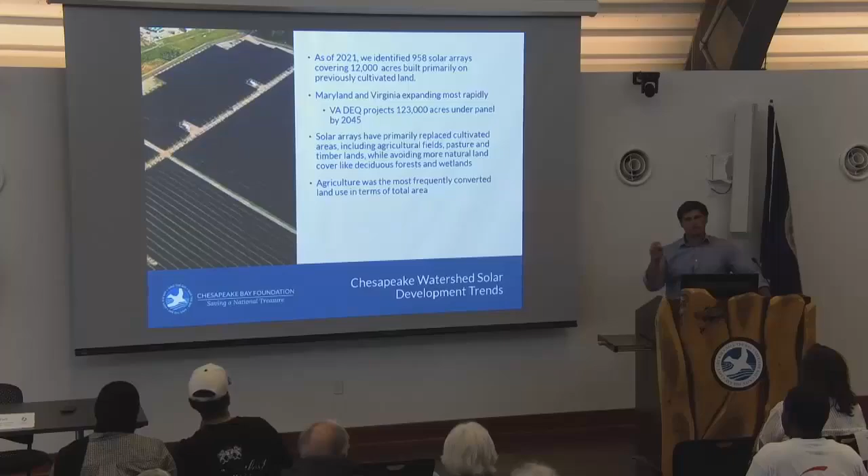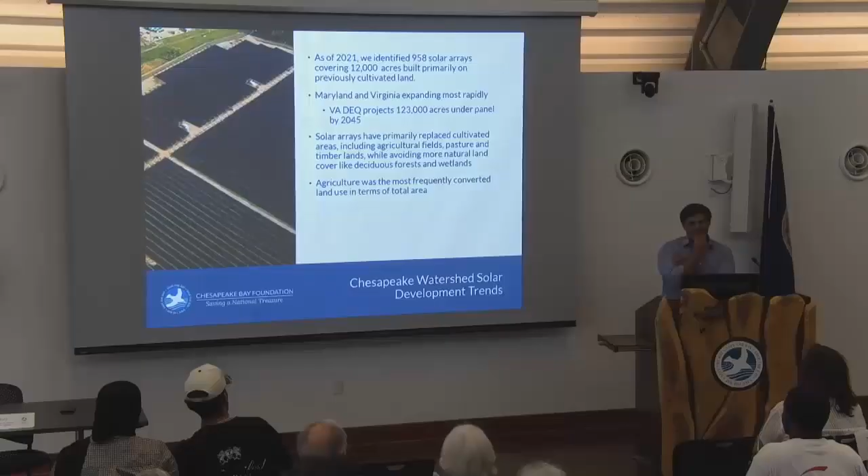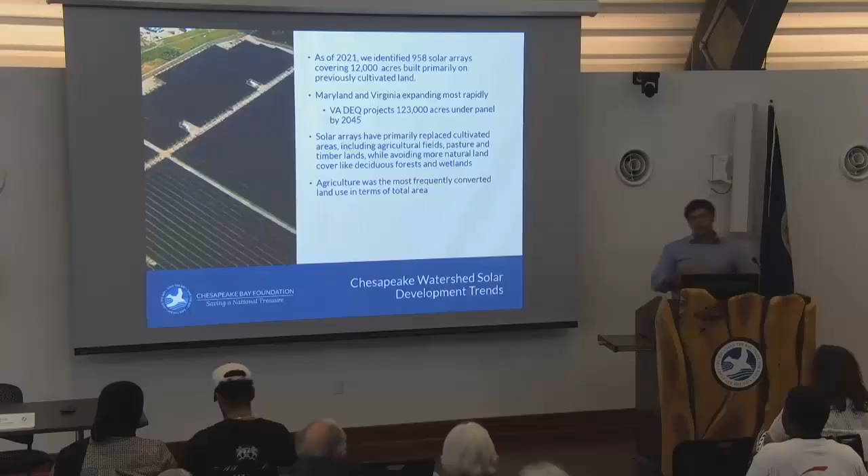Let me add an additional caveat: Norfolk's not a big city in landmass, so I don't want it to sound too large—I just want to give you a frame of reference. The dominant land use that's been replaced has been cultivated areas—agricultural fields, pasture, timberlands—and by and large they've avoided more natural land cover like deciduous forests and wetlands. There has been some Core 1 forest build-out in the DEQ analysis, which is something we try to move away from, but agriculture was the most frequently converted land use.

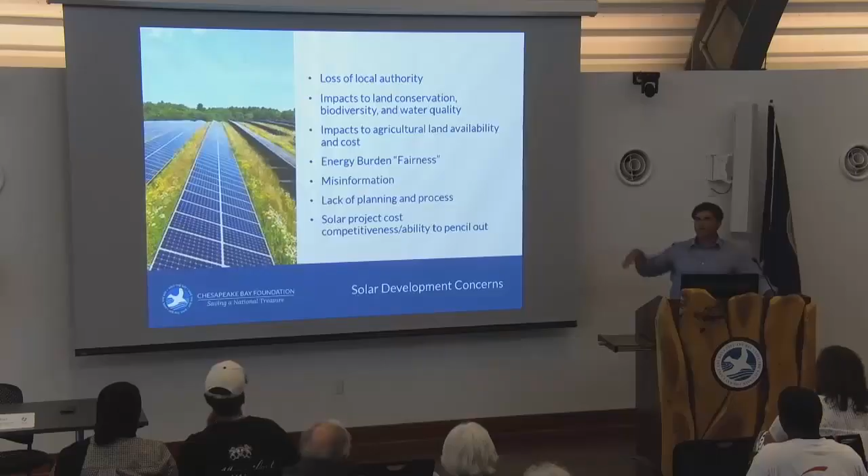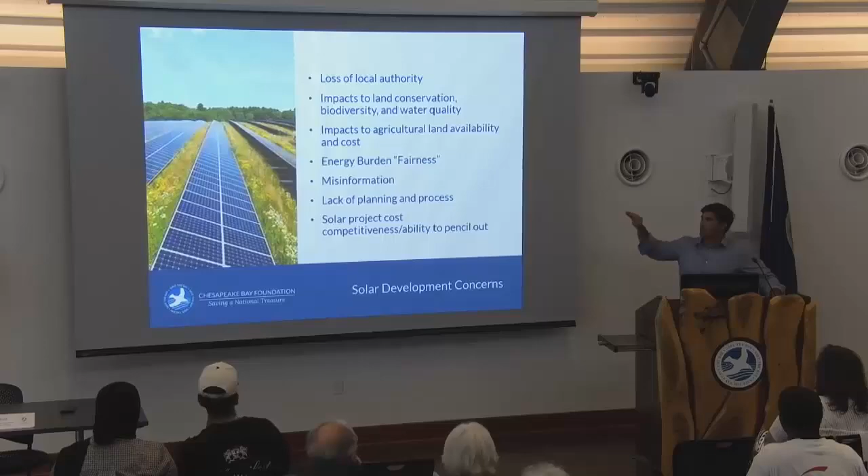Throughout the last couple of years, there has been some pushback as Virginia has tried to move towards deploying solar. We've heard a number of things from localities, from folks in the farming community, or just neighbors. Some of these are really key to CBF—we really perk up when someone brings up issues around water quality or long-term land conservation. There's been a lot of misinformation, but there also hasn't been a lot of resources given to the localities being asked to put these projects in. Things like lack of planning and process came up a lot as we talked to stakeholders around Virginia.

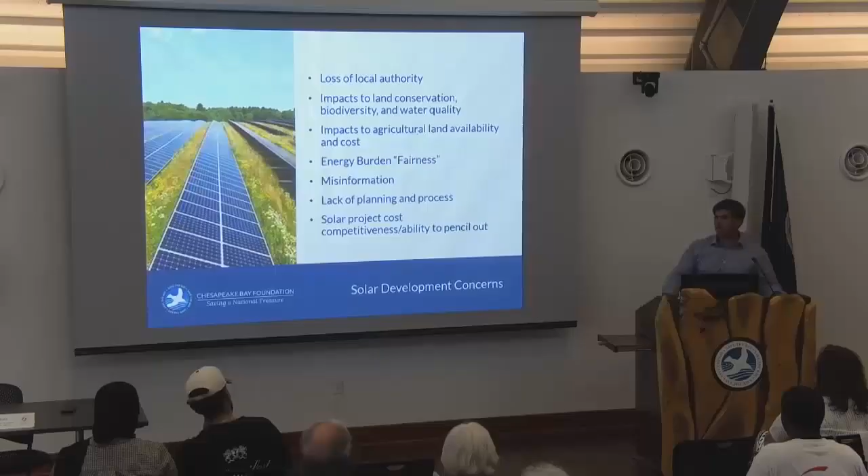So, make sure I didn't skip—this last year, as a result of many of those stakeholder concerns that were raised, there was a robust conversation about solar siting reform in Virginia. In direct response to what we had heard, there were a couple of legislative vehicles that considered two big principles.

One is regional planning. Right now, localities feel like the solar development process is sort of ad hoc—someone shows up, pitches you a project, you don't know how it fits into the larger grid, you don't know what your transmission lines look like, and you don't know if this is the first project or if there are going to be multiple projects. So people had a big question mark on what meeting our VCEA goals looks like across the state of Virginia.

Regional planning is something that's been really effective in a number of sectors throughout the state, so it was a good place for us to start.

The other thing we heard from localities was these projects are really complicated. We don't know how to evaluate whether or not it's a good project, or whether we should be asking for something different because this is a new technology. So the idea of advisory services, setting up a panel of technical expertise that localities could turn to and say, help us understand this. Many localities being asked to accept solar projects right now have a part-time planner, if they have that. So there was a real technical capacity question.

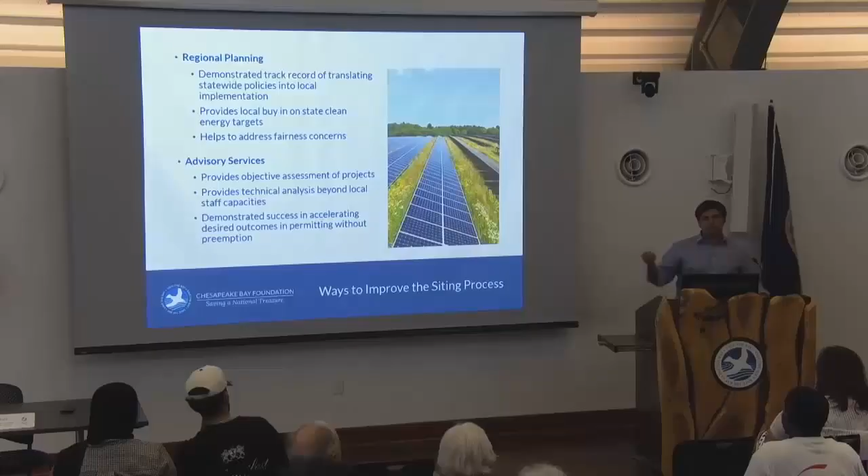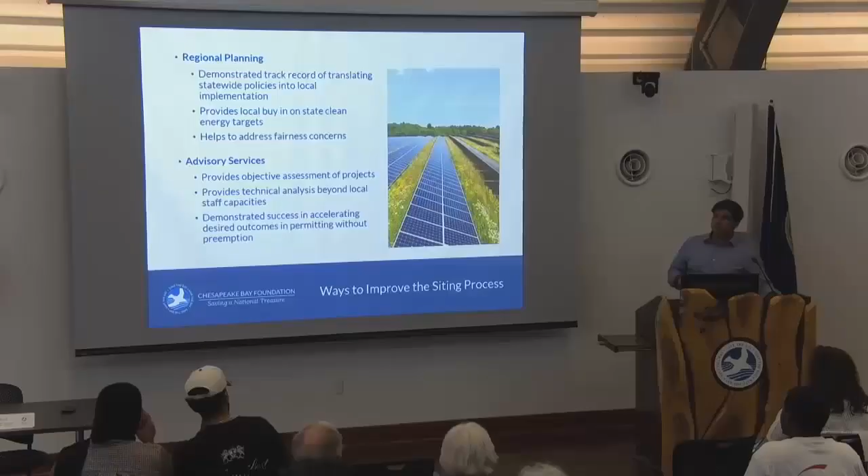These were two of the potential solutions floated this year to help accelerate solar deployment. They did not make it out of the General Assembly, but both concepts have since found fertile ground in other venues. We recently saw comments from the State Corporation Commission recommending some type of regional planning, because there wasn't consistent thought given to how potential projects were going to fit into the grid and transmission. So these are ideas that have been bubbling up in many sectors.

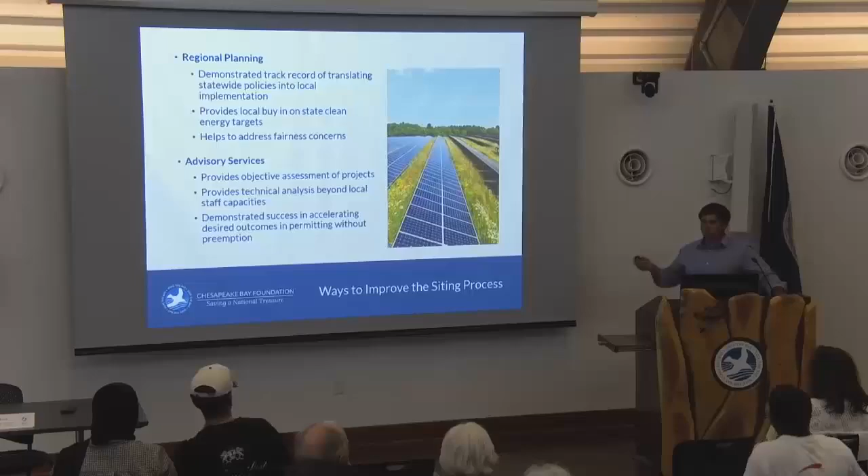Additional ideas for accelerating solar deployment over the last year or two include trying to incentivize siting on previously disturbed lands. In Virginia code, that's anything we've done something on - not just super degraded land, but a big box store, a parking lot. Right now we are really struggling to find a way to accelerate deployment on those previously disturbed soils. So people have floated a lot of different ideas around incentive programs or zoning changes.

We saw legislation this year that really focused on parking lot solar. Unfortunately it did not make it out, but we are hopeful that's going to come back next year.

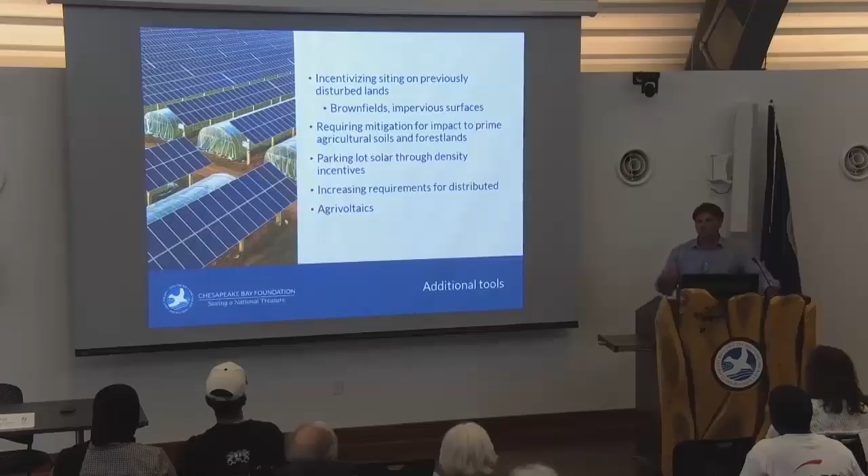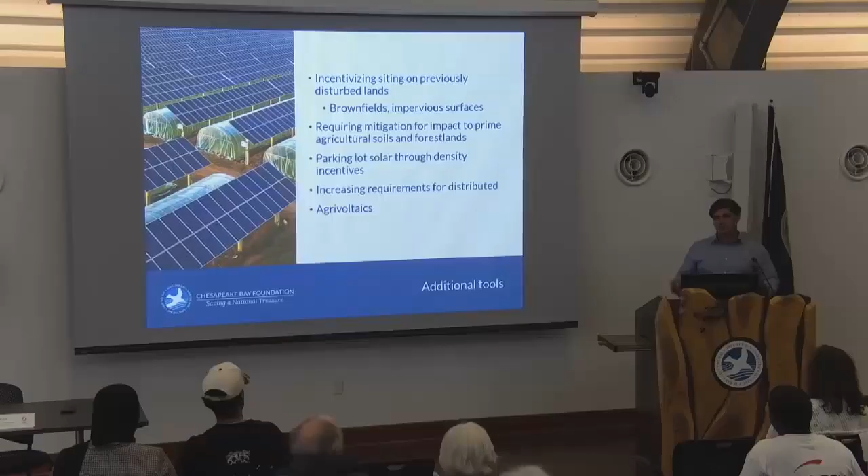There was a big effort around mitigating when solar is located on prime agricultural soils or forest lands. That process has continued and got to a final rule, a place that we're all very comfortable with. So when people are building on prime ag land or forest, they will have to acquire land or pay into a fund elsewhere to make sure we're locking up prime land in addition to the land they're building on.

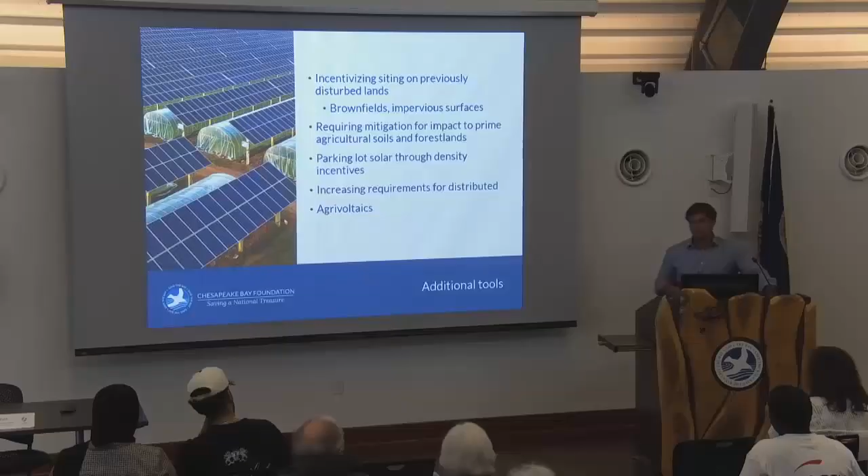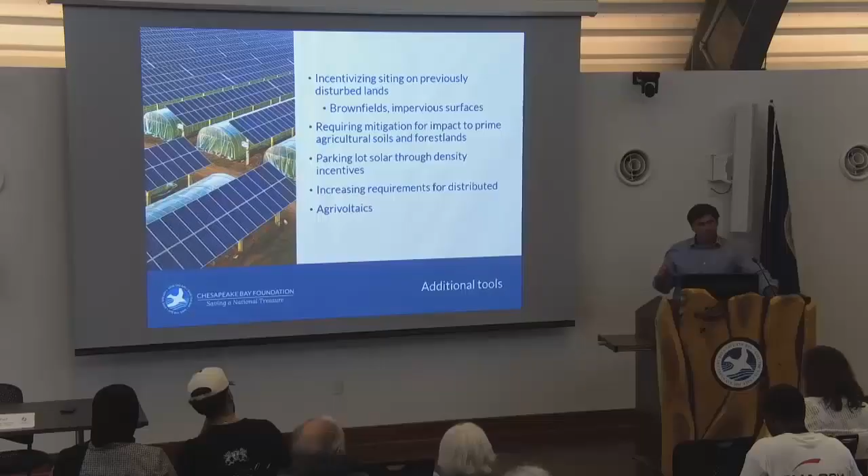And then an area where I think we were really just scratching the surface is the idea of agrivoltaics. Virginia has not really taken meaningful legislative action on this. We're behind where a lot of other states have moved so far, where they've looked at incentive programs, at codifying a definition for by-right solar for farmers that want to produce a crop while also being able to install a solar farm on their property.

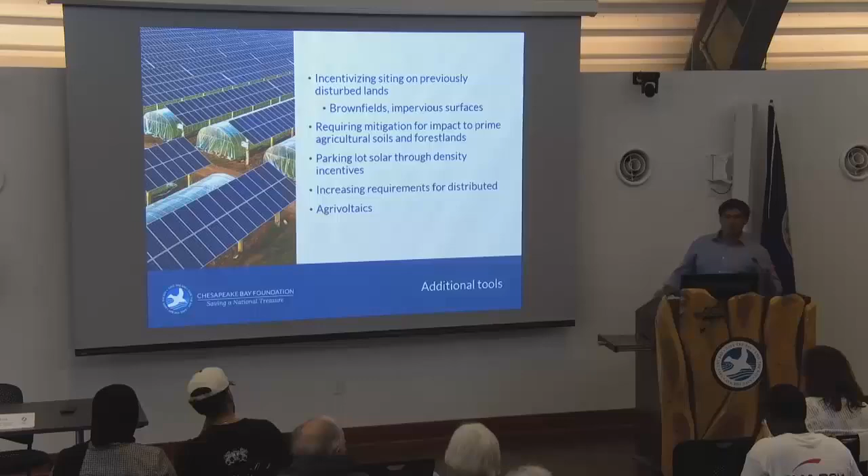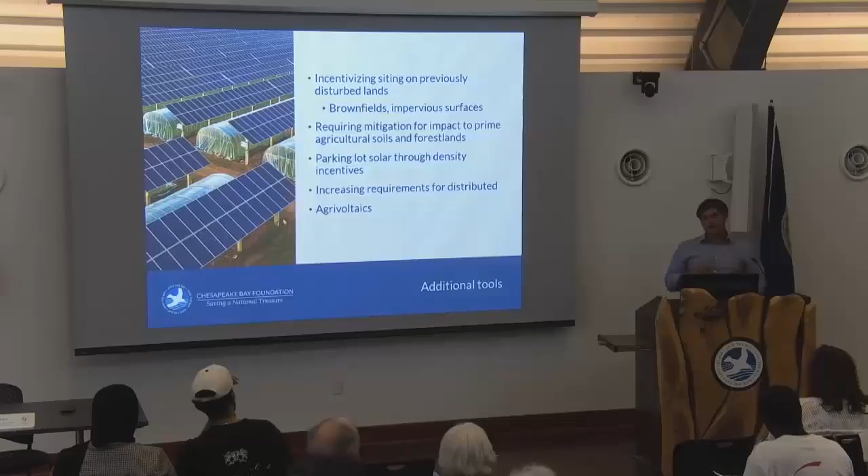And when you look around the world, there's some really innovative stuff happening. What you see on the slide here is folks growing shade crops that need shade under the solar panels. Makes a lot of sense - I don't know why this didn't occur to us earlier, but this model has been very successful in China. They're growing a lot of cut flowers, they're growing some fruit crops, and they're doing it all under their energy production. I think that's pretty incredible and something Virginia needs to continue to take a harder look at.

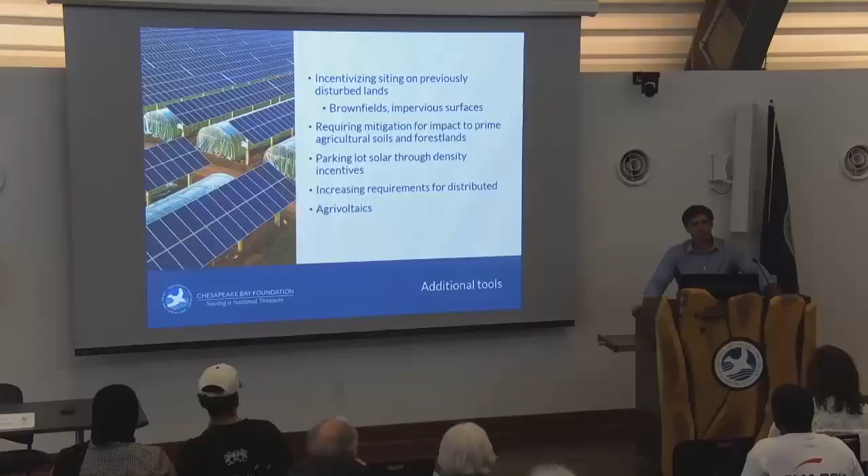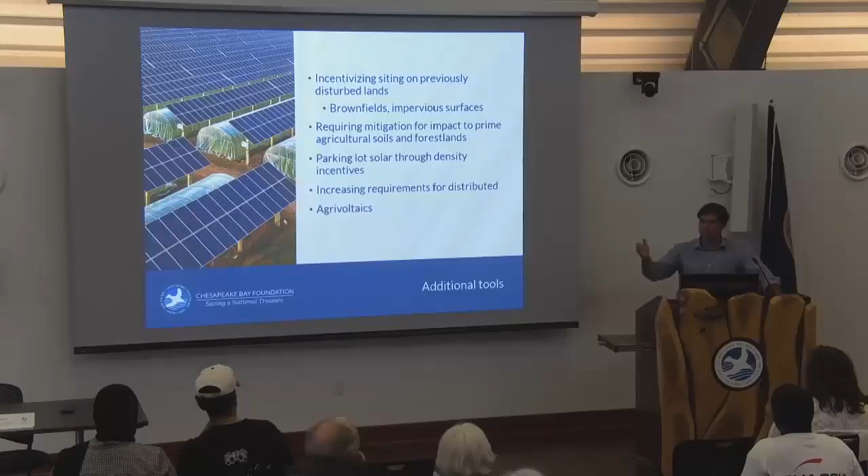We've had some missteps in our foray into agrivoltaics. I have one project where I live where we were supposed to have sheep everywhere, and I've yet to see a sheep under said panel. So people are now, understandably, annoyed that they were sold a bill of goods that didn't come to pass. But part of that is because ownership of these properties changes a lot, and the contracts don't always continue on - that's one of the things we want to look at in trying to incentivize agrivoltaics.

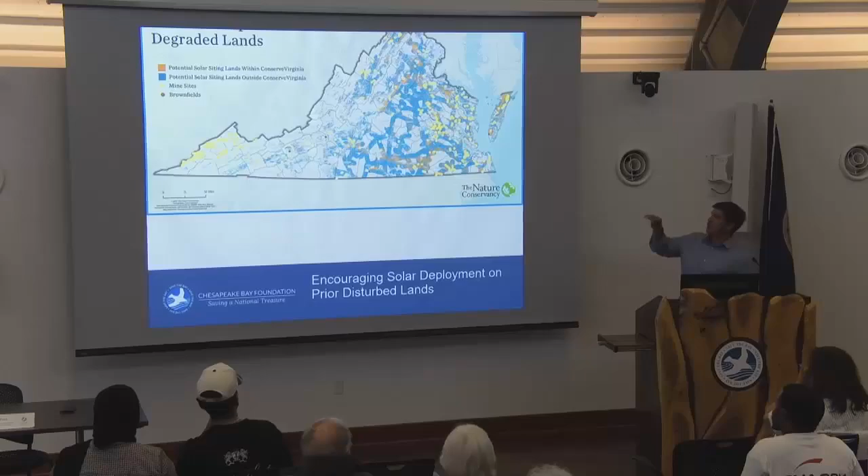Just a real quick map, produced by our friends at the Nature Conservancy. It shows the blue are lands that are good for solar, same with the brown - those are ideal tracts. The sites in the brownish orange are also in Virginia's map for high conservation value lands. So for us, this is really a shorthand map of where you should not site solar, as well as where you should. This also tries to flag mine sites and brownfields, both in that highest level of degraded soil. We've yet to see widespread adoption of siting solar on those sites - we haven't found the right incentive package yet, but we're hopeful we will.

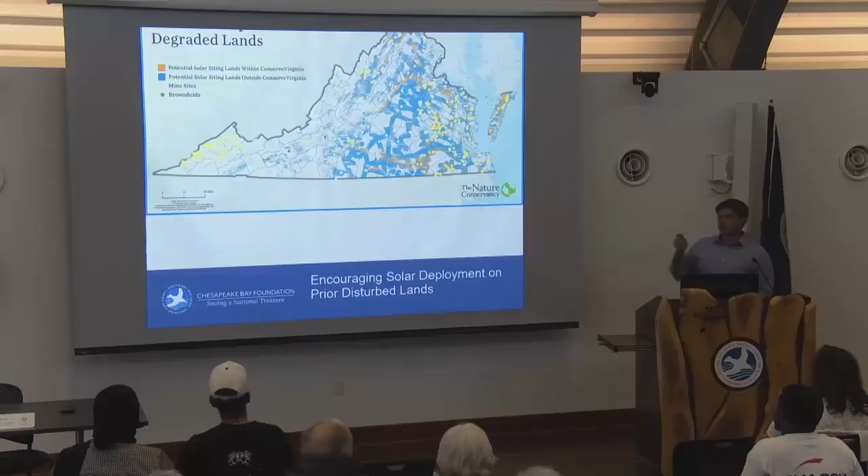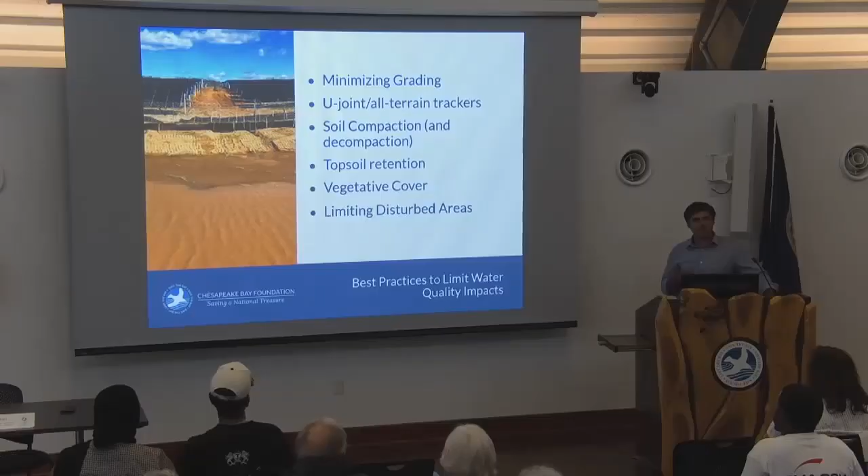And then for the Bay world, what can we do to minimize water quality impacts? We have seen some unfortunate stormwater examples around the state. We have 5 notices of violation in Richmond County right now while we're sitting here. Not a great week. So there are some things that can be done

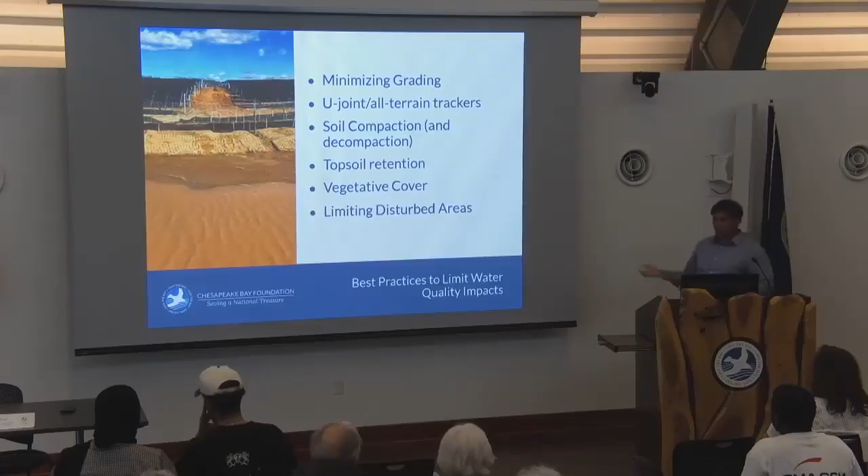that minimize potential water quality impacts. So minimizing the grading—I'll come back to this all-terrain tracker in a second. Making sure you're limiting soil compaction or requiring decompaction at decommissioning. Topsoil retention. A lot of the sites are scraping them in order to accommodate certain technologies, and they're essentially leaving

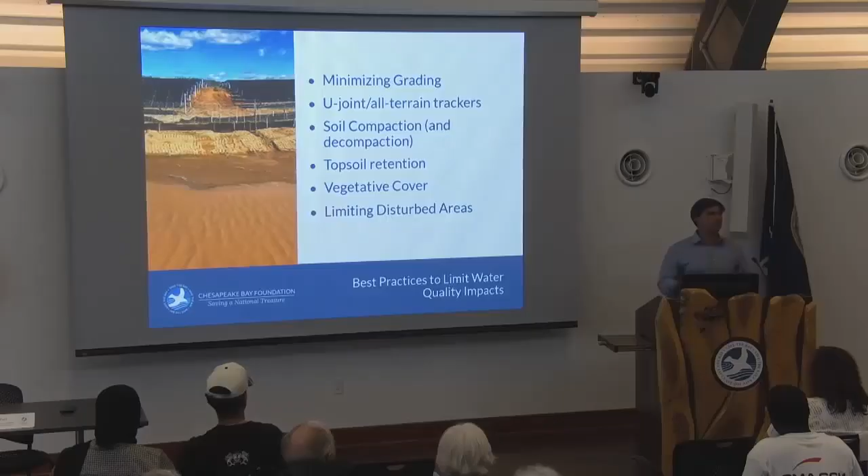bare fields that are then stormwater hazards for the surrounding areas. Requiring vegetative cover and more robust cover, and then a recent concept that has taken hold in a number of states is this idea of limiting how much of the site can be disturbed at a given time. Because if say you're going to do a 6,000 acre project, previously you'd get a contractor to come in and they would clear 6,000 acres. You're not building on that, so you just have a ton of exposed land during that time. Real simple change is chunking it up and saying, okay, you're going to clear 500 acres at a time,

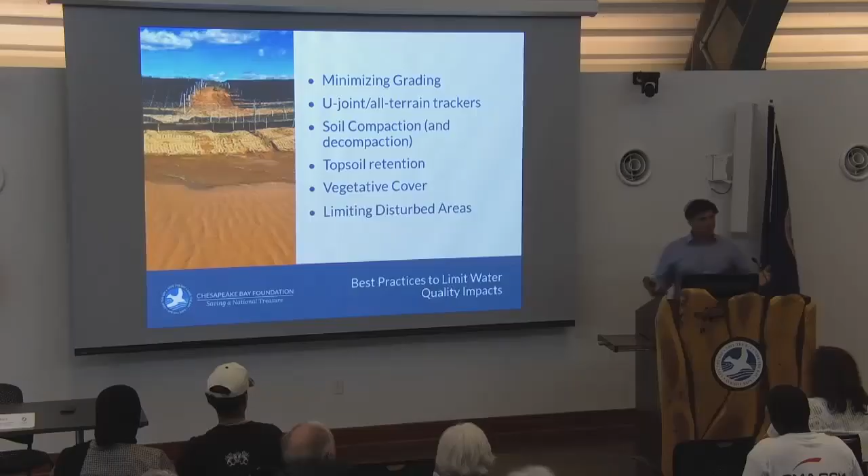and make sure you're working and covering it as you go. We've seen this successfully implemented in other states. So these are not difficult things to do. They're really, in some sense, common sense, but we hope to see them adopted as industry practices.

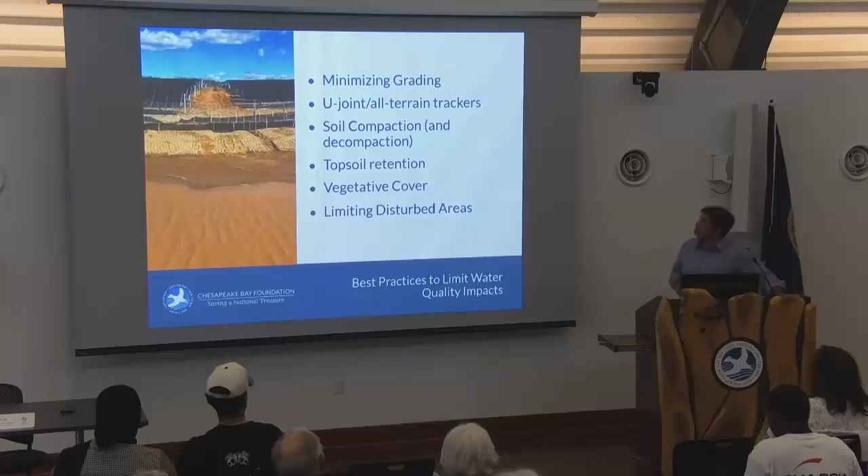The terrain tracking joints, this is what they look like. The advantage they offer is you don't have to take away the topsoil, and you can work with the grade of the land. It allows essentially joints in the panels rather than needing a singular flat surface, which many of the design forms require. And so encouraging people to move to these terrain trackers would also minimize disturbance and potential stormwater issues.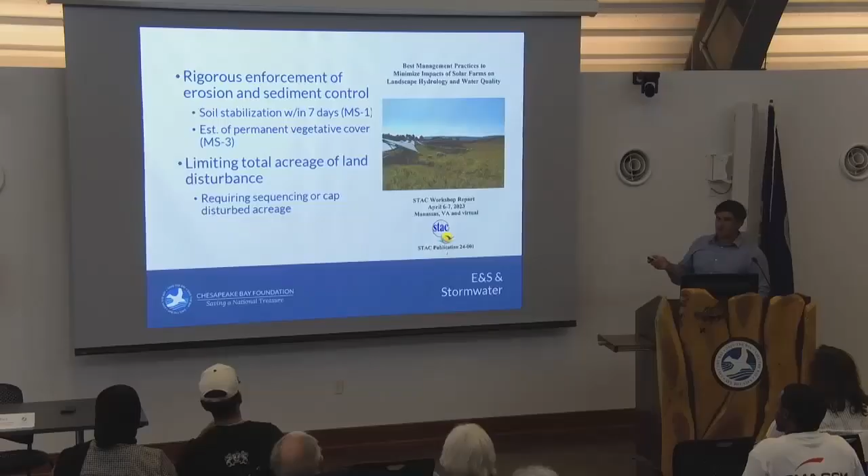A lot of this, the state has already taken action on through updated stormwater guidance. So I'm not going to spend a ton of time on this, and I already touched on limiting the total acreage. But again, Virginia's been very active on this the last couple of years. We think they've made positive progress, but there's still some more best practices that can be adopted. And

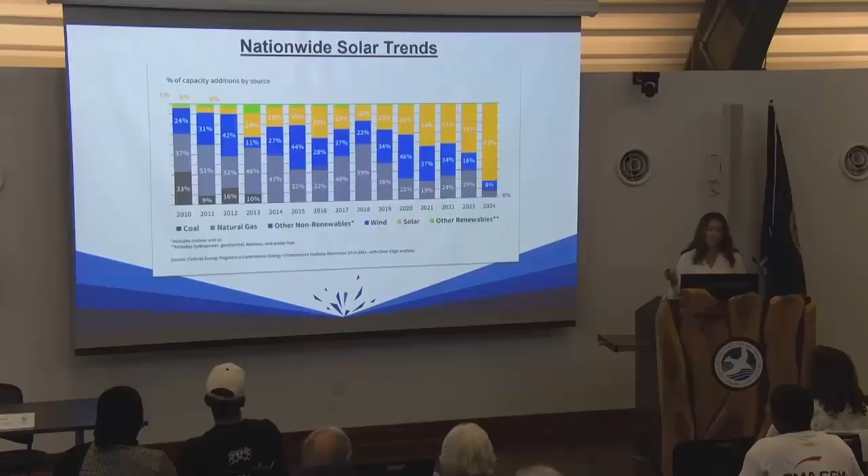Basically, the legislation has a lot of small targets to get to that level—for example, 30% renewable energy by 2030, that's the next iterative target. There are also targets for 2031 and 2032, which I didn't put all of in here. But essentially, the utilities every single year have to have a plan in place to eventually reach these targets and the interim targets.

When I was on the State Corporation Commission, they had to submit that plan to the commission for approval. So there is an entity making sure our utilities are meeting those targets. It's really important to note that if they don't meet those targets, they have to make a deficiency payment, which is like a penalty. That payment is set at a level that incentivizes utilities to invest in renewable energy.

There's a lot of terms in the law about how much the utility can own versus how much third parties can own. I don't think we need to get into that level of detail today, but understand that the utilities have a massive incentive to make this transition.

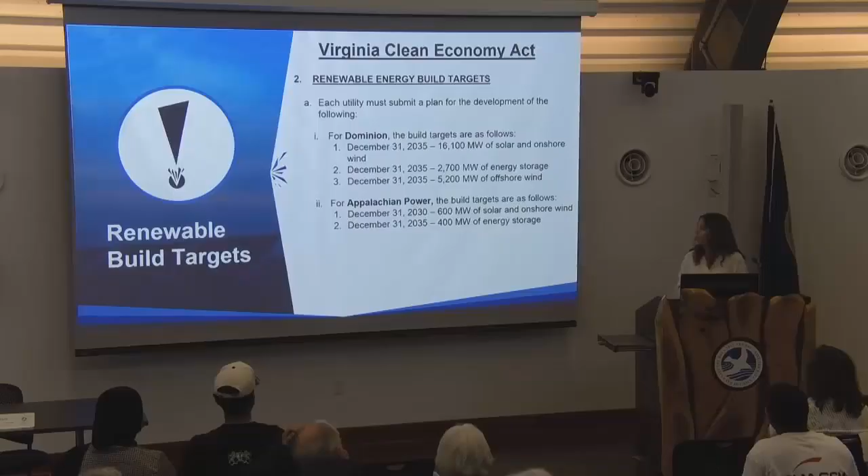Appalachian Power is smaller. They have a much smaller service territory and are coming from a much smaller renewable penetration to begin with, so there's 600 megawatts of solar and onshore wind and 400 megawatts of energy storage. Let me put that in context for you.

16,100 megawatts of solar is enough to power 1.8 million homes. That's not all of Virginia, but it's a pretty significant swath. 2,600 megawatts of offshore wind, the current facility under development here that'll be operational next year, is enough to power 660,000 homes. Put together, that's roughly 2.5 million Virginians powered by clean, non-emitting energy, which is pretty significant, and that's the foundational layer of the Clean Economy Act. For Appalachian Power it's a smaller number, but still 67,000 homes, which is really important for that territory.

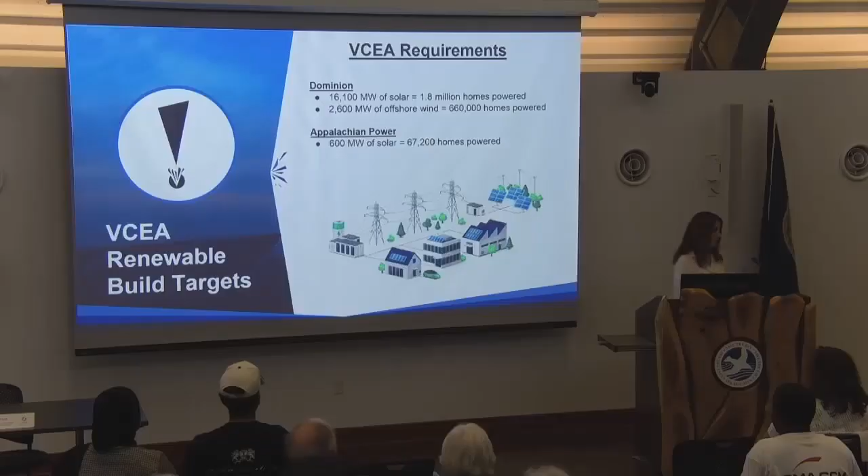So the Clean Economy Act is our most significant law. It sets the tone for how Virginia is going to get to these 100% clean targets. I'm sure there's more for us to discuss, but I wanted to set the foundation for where Virginia is. With that, Christy, I'll turn it back to you. Thank you.

Great questions are coming in.

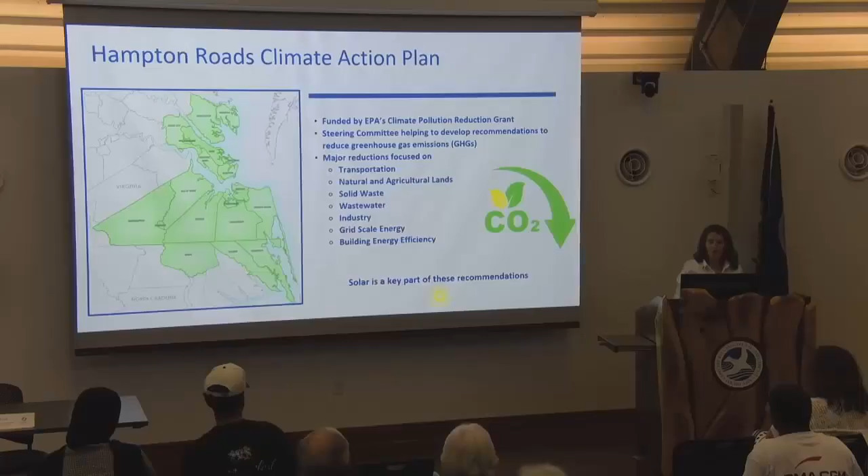So with that said, I'm only going to focus on solar. I could talk all day long about all the other recommendations. I think we're up to about 30 total, and it is still a work in progress.

In terms of solar, we got all of our stakeholders together over the past few years and we've been discussing what the issues are. In terms of how our local governments are helping our residents provide opportunities for solar, we realize not everybody's doing it the same way. Norfolk's doing a great job, and I can say that I'm from Norfolk. But Norfolk's doing a great job.

They have a website, they've got a solar co-op, they're doing all kinds of things, but maybe somebody like Portsmouth or Poquoson, they don't have those opportunities. They don't have the staff to help them have those kinds of incentives or programs on solar. So we realized really quickly that some localities are doing it right, some localities don't have anything at all, and so they're very decentralized. There's too much information in too many places out there. I'm sure you're familiar with that. You can find information about solar everywhere, but you don't know what's good, what's bad.

Like I said, localities are each running something slightly different, and we've learned quickly that not all co-ops are the same. There's also a lack of trust by residents and localities in solar programs and installers. We've heard many, many stories of people just not being sure of somebody who's knocking on their door, what that means, what the quality of the service is going to be, if they can really trust this provider. And there's also a lack of trust in funding and what can be used for what purpose, more of a lack of understanding. And also community types vary, right?

So we have historical homes, aging roofs, multifamily buildings. How are we going to install solar? How are we going to reach those goals that Angela talked about? How are we going to get there when we know that everything's different?